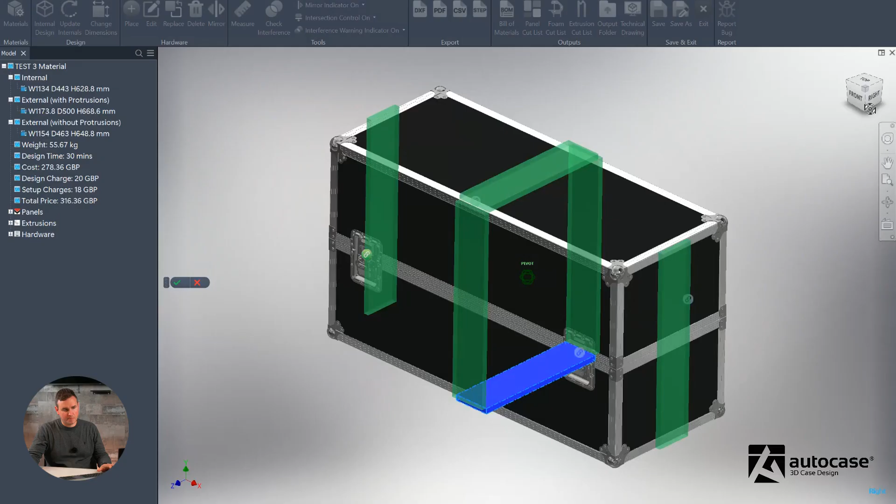We can define a width. We just need to click on any of the other input boxes for that to update. So that's now 130 millimeters wide. We can now define the position. So we can either type in measurements down here or use presets.

And this is the measurement from the center of the caster board or the caster strip to the edge of the case, the edge of the plywood case carcass. So we have 135 millimeters at the moment. So we can make that 150, and you see the preset has also updated down here in the value.

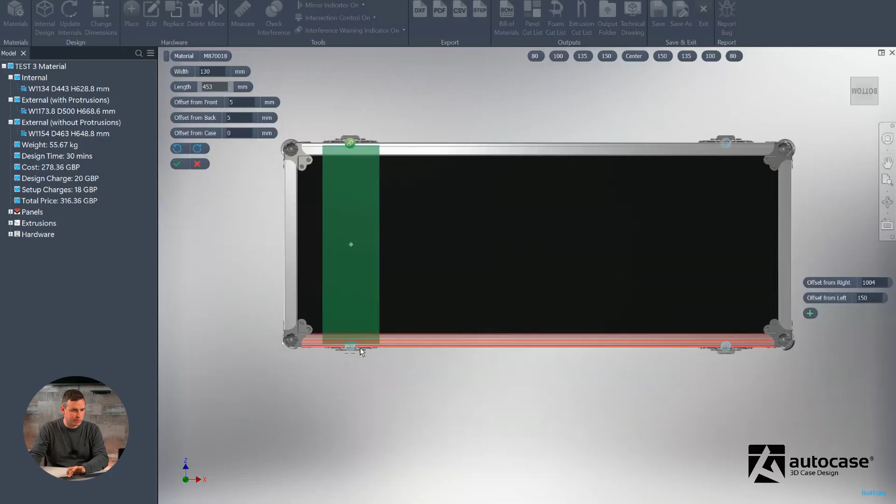If we like, we can adjust these offsets. If you don't want to have the caster board full depth, we're going to do a 5 millimeter and a 5 millimeter offset. And as you can see, it's just moved the caster board in front and back. You can apply that to the case, and we now have a caster strip.

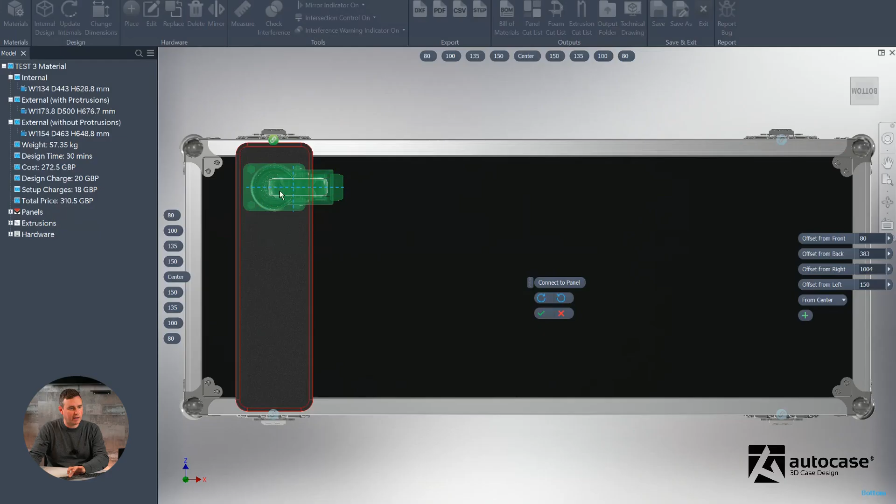We can place some casters on this. We used a brake caster to start with. I'm going to reference it in this corner, and as I know that this caster strip is 150 millimeters in, I will also use the same value to ensure that this caster board ends up symmetrical, and I will use 80 millimeters for now as the offset measurement from top down. So we have 150 and 80.

We'll place a non-braked version as well, and we'll use the bottom left anchor point, and it will automatically sense the alignment. So there it's already snapped for us, so 150, and we can do 80 again on the height. So we now know that they're all symmetrical. So now we have a caster strip that has a braked and a non-braked caster.

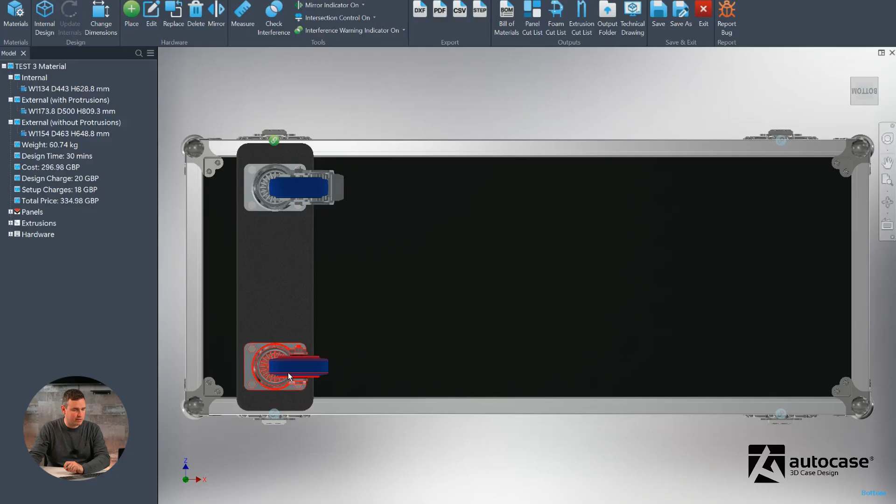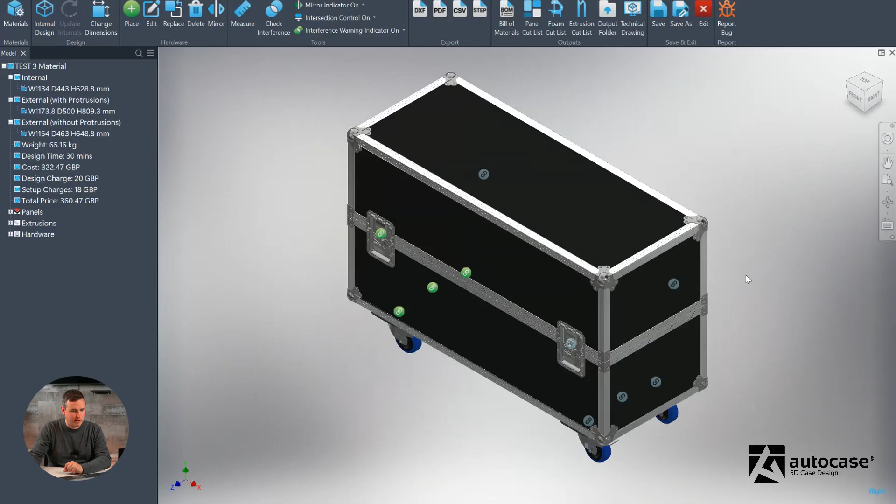All the holes we know are symmetrical because we've placed everything in a sensible fashion, and we can simply mirror. We can select the caster board, we can select the wheel and this wheel, and then use this work plane, and it will mirror over. Press the green tick, and we now have a mirrored set of casters on caster strips.

And we can see that this is the master because we have the green master icon just under there. So by editing this caster board, if I was to adjust the position from 150 to 200, both caster boards move, and so too will the wheels, and they have moved with the caster strip.